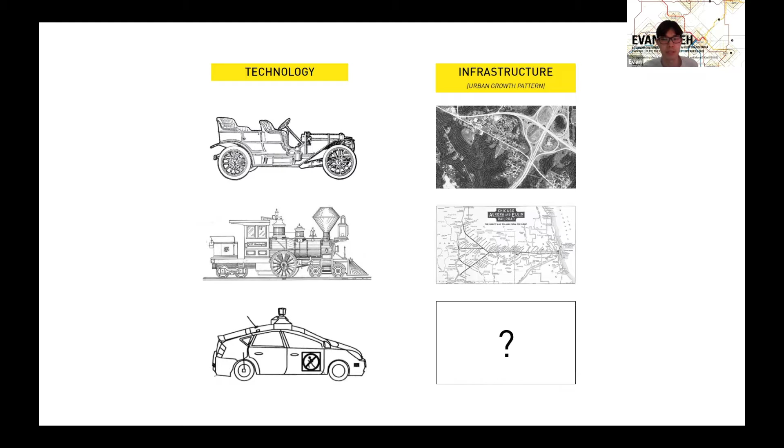Historically, technology has always had an intricate relationship with the urban growth of our cities. Understanding this symbiosis, I argue we need to think of the incoming AV revolution not only as new technology, but as new infrastructure that will have profound effects on urban growth patterns. Only by understanding the autonomous vehicle as new infrastructure can we conceive of it as a potential new system of mobility, with its blessings and flaws, just as the locomotive or the automobile became foundational infrastructure for city planning in their respective eras.

We also have to remind ourselves that despite the dominance of car culture today in the US, it's just one of many mobility and transportation types used to get around the city and plan our cities upon. With the introduction of the AV, we have to consider these larger issues and frameworks of mobility at large, which reflect cultural and behavioral norms. How we choose to move around the city has vast implications on how the city is planned and evolves, both at the regional scale and at the urban design street level.

Before we look too far forward, we also have to look back and understand the past. There has been a continual historic push and pull between private and shared mobility as the dominating driver of urban growth in the US. With the prevalence of the automobile today in planning and design, it's easy to forget that the US was once one of the leaders of public transit ridership internationally before the dominant rise of Fordism. So while the technology has wildly evolved, behavioral and cultural norms might very well have not.

In the 1870s, pre-automobile, apart from walking, there were two forms of transit you could take. You could flag down a horse-drawn hansom cab if you could afford it, or walk to a designated carriage stand and wait for a seat on a horse-drawn tram traveling on predefined fixed routes. The first method is analogous to how taxis and private vehicles operate today, while the second is essentially modern day public transit, how buses and rail work today. I bring up this example to highlight that time and time again in our history, the issue is not necessarily the technology itself, but how passenger behavior is associated with that technology, and how we can incentivize passengers towards certain modes of transportation depending on how we envision our cities should be planned.

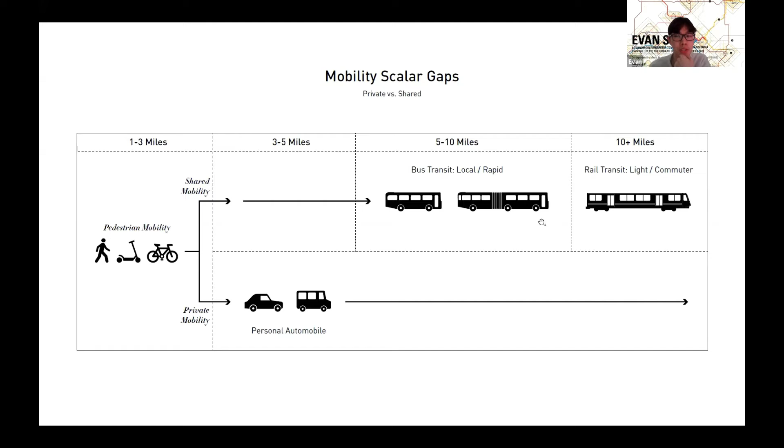And if there were to be a proliferation of the AV into the private mobility sphere—single occupancy, gasoline powered, privately owned—there's a real fear that automation would essentially become cars on steroids, enabling greater urban sprawl, exacerbating congestion, and highlighting mobility inequalities. So to me, I see a huge potential for automation to affect this sphere, which has the potential to really revolutionize transit networks around our cities in mobility.

So firstly, a whole new range of transit vehicle sizes can be introduced. Smaller mini shuttles that can run on flexible, on-demand service, kind of like how Uber and Lyft run today, but also all the way up to revolutionizing existing rapid bus transit.

And the biggest thing is the reduction of the driver cost, which accounts for over 60% of the cost of running service in existing rapid and local bus transit in cities today, which would allow an increase in both service frequency and coverage.

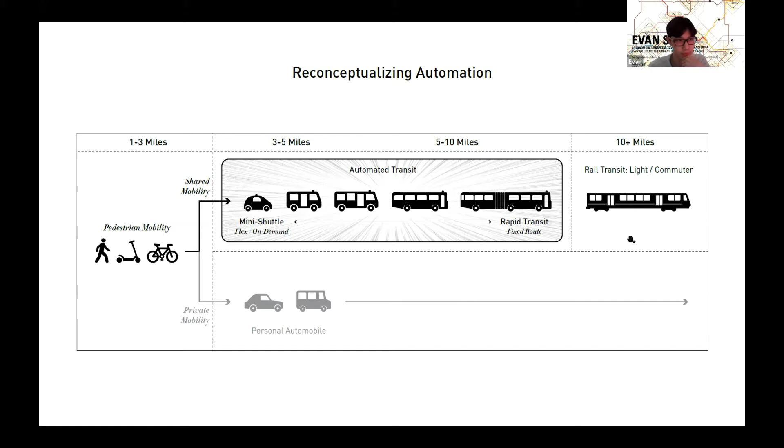So I ask again: what future do we aspire towards as architects and designers interested in the urban realm and the future evolution of the city? This value proposition must underscore everything we look at as urban designers, all the design work we undertake.

And if we do aspire towards this best case scenario, what is the framework for how to reach it? It's easy to imagine a kind of utopic vision of the AV-enabled city without providing a framework for how to reach that future. So, through policy, planning, and design, how do we get from the worst case to the best case? It's really vital as designers of the built realm to take a position so we can guide the introduction of the AV down that path before it's too late.

So in effect, my research speculation argues the following: the private car caused public transit to decline historically in the prototypical US city. And now we must use the automated shared car to return us back to public transit as a model of positive urban growth. The research is organized into three larger frameworks.

Part one envisions how the mobility model needs to change through key transportation policies that lead us toward this new model. Part two envisions how the everyday person, the everyday citizen of a city, would actually experience such a mobility paradigm shift. And part three explores the implications of such a paradigm shift on the actual city of the future for development and urban design.

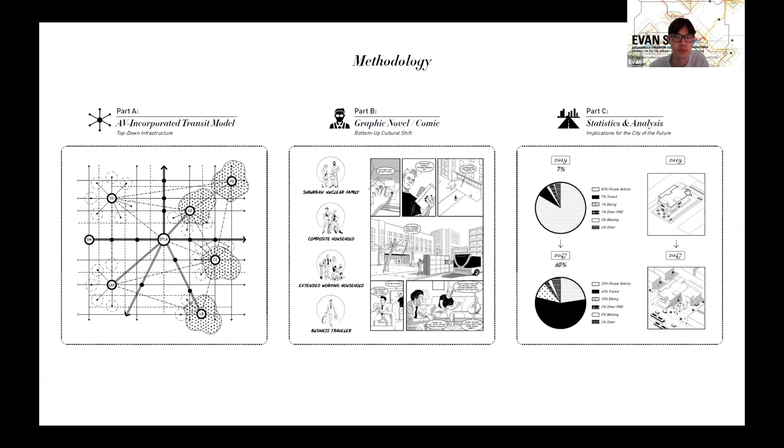The graphic novel is also a way to combat the historic proliferating celebration of the car in the American imaginary through media campaigns, car adverts, and especially through Hollywood. And it offers an alternative story that might perhaps be read by children and the everyday Angeleno.

Adults who grew up reading comics and are now in a position to impact change in the US, for example, can be convinced that alternatives to car culture really can exist, that there is hope to transition from the autopia of today to the transitopia of tomorrow. And of course, where better to situate this kind of potential speculation than Hollywood itself.

The city of LA, known historically for its love affair with the private automobile, a city where even carpool lanes have traffic, where the iconic urban typology is this mid-density urban mat or sprawl. A city Reyner Banham so famously describes in his four ecologies, naming one of those ecologies Autopia, the idea that the Angeleno drives onto the highway as a way to see and be seen, reconceptualizing the highway as a spatialized and privatized form of public spectacle.

But ironically, in its civic and historic DNA, LA has something before the car. This first period of LA, from its birth to World War II, is shown here on the left. The common misperception is that the private automobile caused its sprawl, but that's not true. Rather, private land speculation enabled by transit in the form of streetcars and trolleys drove the development of what we call streetcar suburbs, which produced the actual mega region of the city.

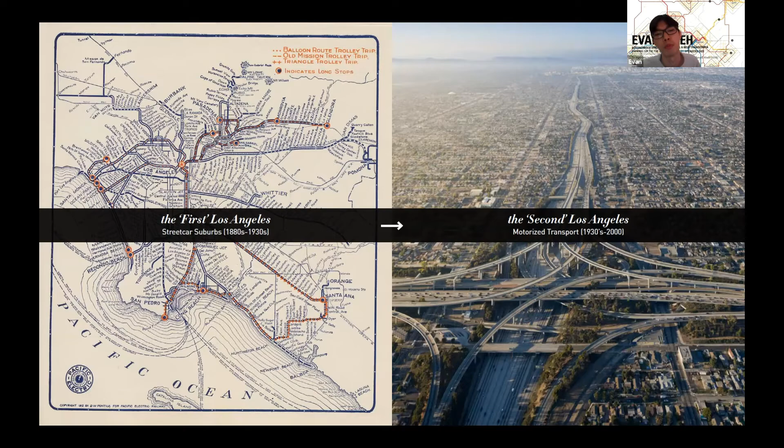The second LA, the LA that produced the stereotypes about cars, traffic congestion, and a shrunken civic realm following the dismantling of all the rail lines, runs roughly to year 2000. This is what most of us associate LA with predominantly.

My speculation places itself within the paradigm of what's called the third LA, which describes the city as taking real and measurable steps to move past the freeway and the private car. In this third LA, the city is folding back on itself, looking to develop more intensely inward. At the forefront of this emerging city is a massive investment in public transit that began since 1990.

In late 2016, voters in LA approved Measure M, which gifted Metro 120 billion dollars over the next 40 years to build a 21st century public transit system until year 2047.

However, when I was diving into this, I realized current Measure M budgeting and messaging has really focused primarily on the expansion of its light rail network.

However, statistics show that 80% of transit riders in the city take the bus, and of these bus riders, 92% are people of color and lower income. So unintentionally or not, Metro's obsession with light rail, a mode that targets more upper income residents of the city, comes at an opportunity cost of servicing and expanding the city's bus network, a service that hasn't seen a major upgrade in over 20 years.

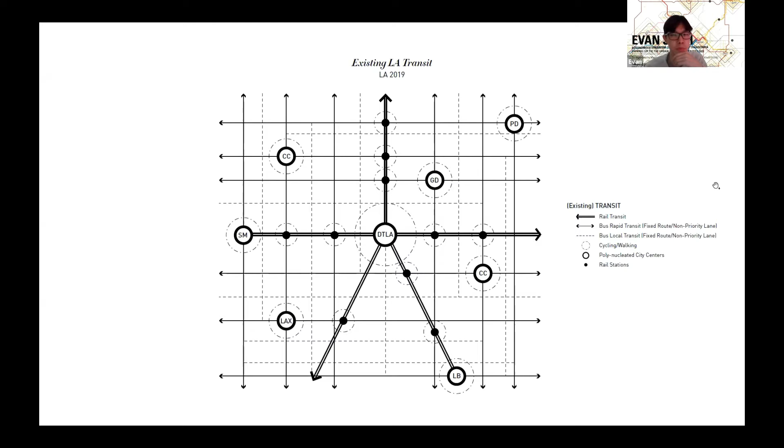Mapping the existing LA transit network reveals a monocentric, downtown-oriented rail network overlaid on the Jeffersonian grid of the city, reflected in its grid network of bus routes. But we know LA is actually a prime example of a polynucleated city, meaning it has multiple job centers scattered metropolitan-wide. The grid paradigm of the city, however, means that when traveling from polynucleated center to center, transfers between grid axes are often unavoidable and therefore inefficient.

So in the new model I'm proposing, polynucleated centers are first hierarchically connected by new autonomous rapid transit, which could be free of cost, subsidized by things like congestion pricing, for example. These BRTs could serve as precursors to the light rail, the first step in implementing transit spoke corridors that facilitate direct connections between polynucleated city centers.

Then fixed route local bus service and frequency is intensified around these existing hubs, filling in the 3 to 5 mile last mile mobility gap and creating a blueprint for intensification of urban growth and land use around these polynucleated centers. Lastly, areas between these centers, areas of low density that traditionally don't have enough density and ridership to support fixed route transit, are serviced by flexible on-demand automated transit mini shuttles, similar to how transportation network companies or TNCs like Uber and Lyft work today.

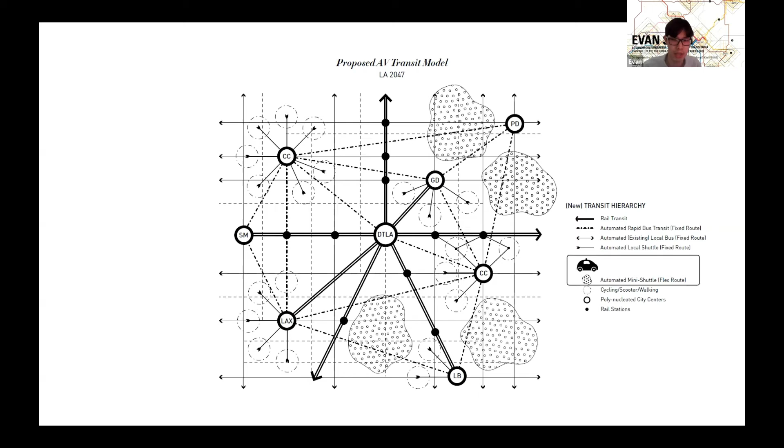Played out on the actual transit paradigm of LA, this results in a new model that cannot be categorized as either hub and spoke, nor as a grid, yet exhibits characteristics of both.

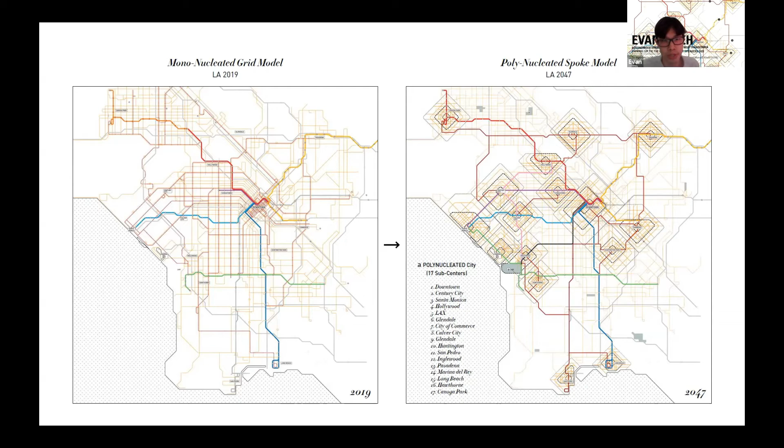The new AV-incorporated transit model much more accurately reflects the polynucleated nature of the city of LA, which does not have as defined a monocentric downtown core as most other cities do. It transitions the monocentric grid model of today towards a polynucleated spoke model that reinforces these job centers.

Zooming into this model, the new transit hierarchies and trip chaining are implemented. First, light rail is number 1, then BRT becomes the service line precursor forming the backbone of connections between these cores. Overlaid on top of the existing local bus network is number 3. Then a series of automated smaller fixed-route shuttles at number 4 service these core districts in zone B at high density of coverage and frequency.

Finally, an automated flex and on-demand mini transit shuttle service, number 5, services the lowest densities, single family suburbs, or single to mid-range densities. Low occupancy vehicles are disincentivized from longer distance commutes by transport zone fees, for example when crossing zone C boundaries, which I've outlined here. They work in tandem to support rail and bus rapid transit for long distance commute, while smaller automated vehicle sizes are used for medium to short range trips.

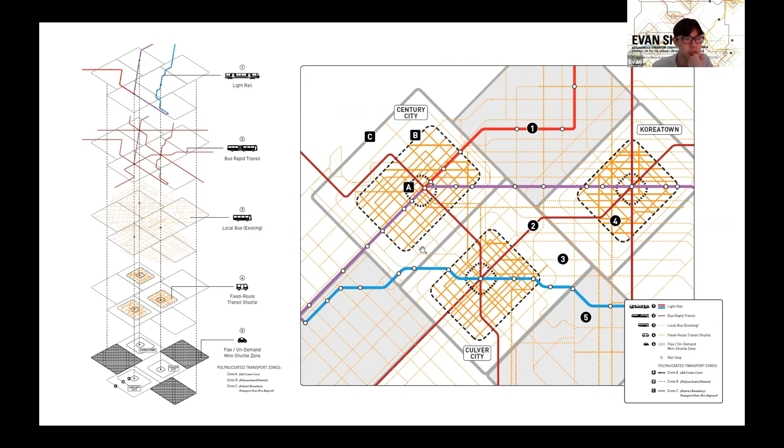Given the all-encompassing nature of this top-down transit paradigm shift, it's crucial to understand how this top-down network is used bottom-up by vastly different Angelino households whose commute types, trip patterns, and mobility needs are impacted. Collated together, they demonstrate the wide capacity of the new automated network to get citizens all around the city for their distinctive needs.

These 5 archetypes utilize this new transit in very different ways based on where they live, work, and run errands. So a day in their life takes them across many geographies and job centers as they interact both with each other and with the network.

Each of these households also represents widely varying incomes, demographics, and family structures, aiming to represent the majority of the Angelino population, from the upper income suburban nuclear family to the lower income family whose commute lengths are vast, to the younger millennials who bike the city, and even to visiting business travelers who use the city in different ways.

These narratives show 5 distinct experiences of the automation paradigm shift in what I'm envisioning for LA in 2047. Each of these stories shows how automated transit has actually improved their lives in key and noticeable ways. A lot of the topics I dive into are listed here.

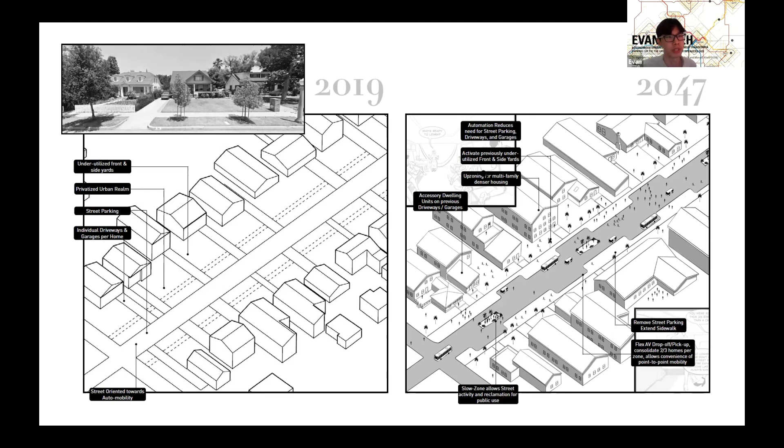Mrs. Smith's Flex AV has picked up one of her coworkers, Jenny, who is off to work as well. As they arrive at an intermodal transfer station, the transfer experience has been vastly improved, and transit wait times have been drastically reduced.

Mrs. Smith tries to convince Jenny that their need for owning a car is gone, which allows their family to add an addition to the home like they always wanted, as they walk from the metro stop under a covered shelter to the office building downtown.

Meanwhile, Mr. Smith begins his day by stopping at a local grocery store to run errands. Because he wants to avoid carrying groceries, he calls a Flex AV transit shuttle to take him home. While he's charged a higher trip fee for this convenience, it lets him replace owning a personal car with the same point-to-point service. Because it's a short distance, he avoids paying the polynucleated transport zone fee. On the way home, Mr. Smith adds a stop to pick up fast food for lunch.

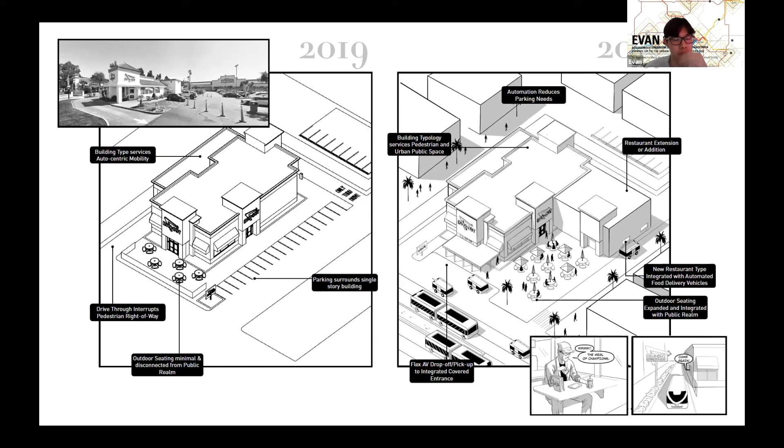One of the most infamous building types invented from the rise of the automobile, oriented primarily around the spatial queuing constraints of the car, is the fast food typology. This typology has now transformed in 2047. Because automation reduces the need for parking, the parking lot has been readapted. A new restaurant extension activates a newly created public space integrated with the sidewalk, while AV drop-off zones are integrated with the building entrance.

Meanwhile, back at work, Mrs. Smith and her colleague debate the best way to get to their midday meeting in Century City, deciding that automated BRT is both the cheapest and fastest option. In this future, the bus is integrated with the Metro app, which lets Jenny ping the incoming bus, reserve seats, and geolocate its arrival. Inside the bus, the experience has been upgraded, while AV BRTs receive priority and fast passage on HOV lanes and highways.

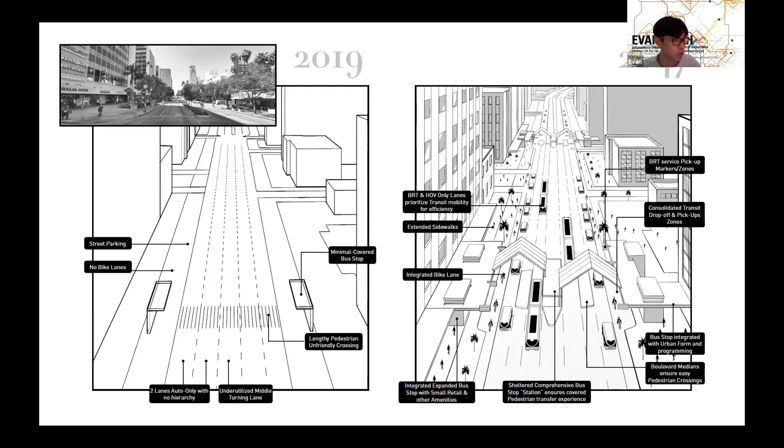When Mrs. Smith and her colleague transfer between two BRT stations, the transfer station has been vastly improved, along with the entire street composition and restructuring. Bus stops are covered and integrated with adjacent urban form, as well as activated by small-scale programming, retail, and other amenities while passengers wait. Boulevard medians ensure easy crossing and a covered pedestrian transfer experience.

Later that night, the Smith family meets in Culver City for dinner, and because both parents don't need to worry about driving, they can indulge in drinks. They call an on-demand AV transit shuttle home, which gives them a price discount due to the vehicle's high occupancy. By the end of the day, a summary of the day's trip charges is displayed on their Metro app, showing how transit in the city can rival the average cost of owning a car per day. This day has demonstrated that the shift toward transit as a mobility model in the city is not only economically possible, but behaviorally desirable, even in low density suburbs with families and lifestyles that demand the convenience of point-to-point travel.

The second story I want to share focuses on issues of transit equity, told through the lens of a city transit planner as she conducts a public engagement meeting with local residents directly impacted by automation. Here we can really use this narrative to tackle head-on issues of transportation inequality that have existed in the history of LA and North American cities at large, and explore how automation might be used to rectify, address, and improve conditions for those historically disadvantaged by new technology.

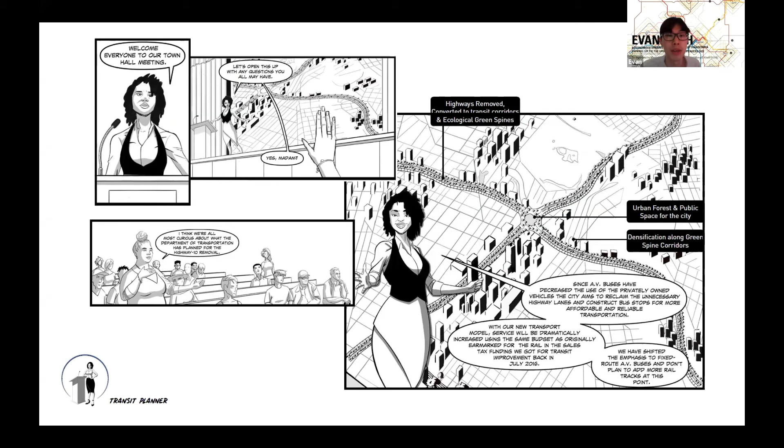Ms. Reynolds, our hypothetical transit planner, begins her story by welcoming everyone to the town hall meeting, explaining how, since AV buses and automated transit have decreased the use of privately owned vehicles, key freeways have been reclaimed at the metropolitan level and converted to ecological green spines and public spaces. At the same time, emphasis has shifted to fixed and flex route AVs with a dramatic increase in stops and services. She shows an image of the radical conversion of the former 405 freeway into an ecological green spine functioning as public space with urban forests and an ecological waterway for sustainability and resilience.

This converted spine also serves as a transit corridor encouraging new densification along its edge. Where the highway previously divided neighborhoods, especially lower income neighborhoods through redlining, with buildings turning their back to the noise, pollution, and traffic, the same footprint can now be flipped into a way to stitch communities back together with urban amenities. This might seem like a radical idea, but it already has a lot of precedent around the world today.

Some of you may know of the Cheonggyecheon restoration in Seoul, South Korea, where a major overpass highway cutting through the city was removed and restored back to a public greenway and waterway with a channelized stream, to great acclaim and success. It's hard not to imagine how something like that could actually happen in the US given the right vision and implementation.

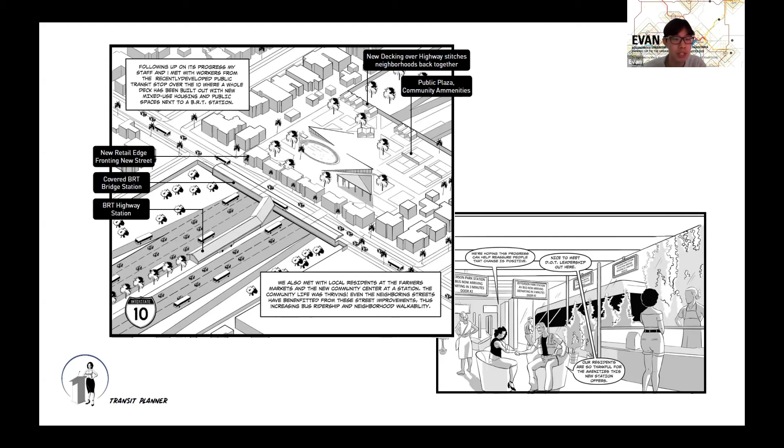So Ms. Reynolds talks about how she met with local residents at a new station typology the city has begun construction on. Where previously bus rapid transit stops were stranded on islands in the middle of freeways, a current condition in LA, the city has now decked over an underpass highway with a new hybrid public space and transit stop that literally bridges two communities back together, with amenities like sports and recreation, a community center, and even new affordable housing and a retail main street.

At this on-the-ground meeting, she talks with local residents about a new community improvement district initiative that has impacted their neighborhoods positively. In high traffic intersections like Crenshaw Boulevard, reduced vehicle demand has allowed previous multi-lane road right-of-ways to be converted to public space. This community improvement district plan, which I call a CID, is an alternative to BIDs or business improvement districts, allowing reinvestment of property tax back into the same community it's taxed from, with decisions chaired by a community board made up of members of that same community.

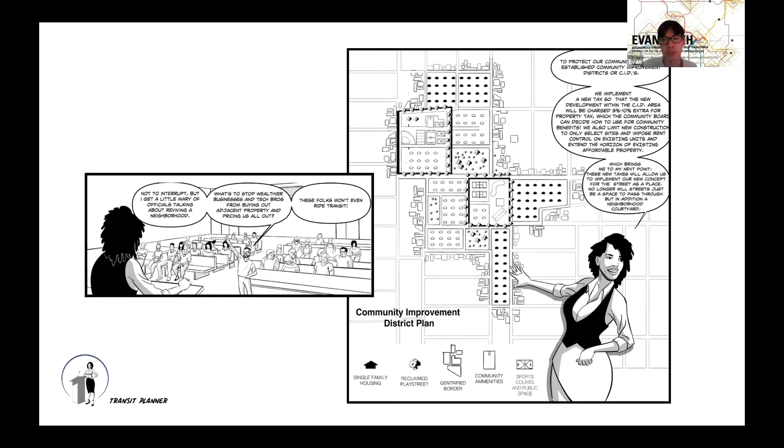Hand in hand with this idea of the CID is the idea that streets are a public community good and should be treated as such. Streets as a play space or front yard of communities can be reclaimed for public use rather than just for private vehicles. Ms. Reynolds explains how playgrounds, gathering places, and walkable, amenity-dense community services will be implemented at the ground level through the CID community loop, where development on outer, more commercial corridors protects the interior blocks consisting of single family housing, more typical of LA's urban grain, protecting them from development gentrification.

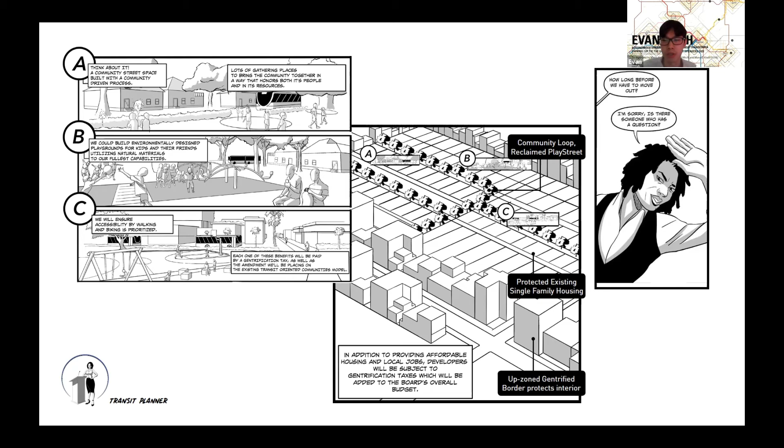Property taxes on these outer development corridors go directly into funding community-driven public and street space improvements on the interior. And of course, as Ms. Reynolds talks, the community voices much concern about how things sound expensive, who is supposed to pay for all of this, and gentrification concerns, but slowly members of the community board in other districts begin to testify how these initiatives have started to show positive effects in their communities.

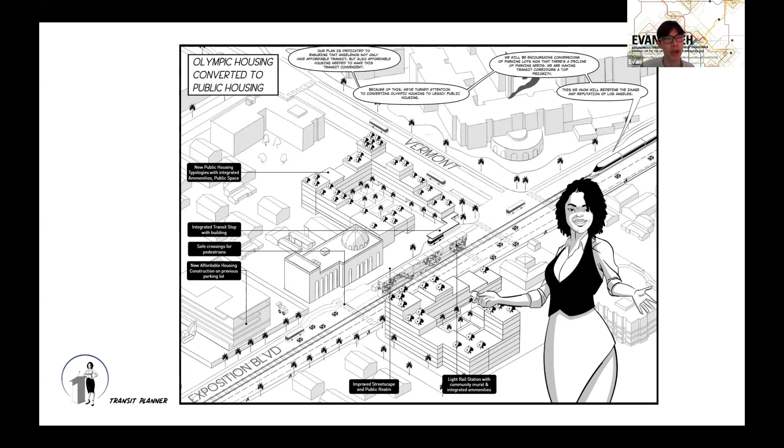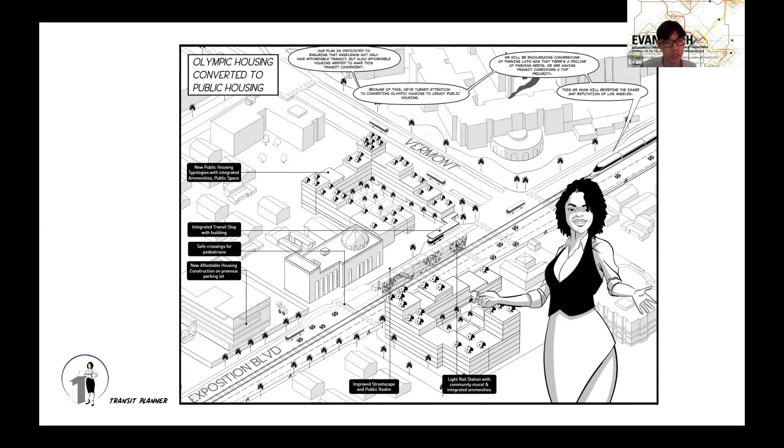For example, around the Jefferson area, she details how former housing created for the 2028 Olympics has been converted into a new model of affordable housing centered around access to affordable transit enabled by AVs. At the same time, the reduction of parking needs due to automation, especially in a city like LA where parking makes up such a large percentage of open unbuilt space, means new opportunities for affordable housing linked to transit-oriented development integrated with AV drop-off zones, transit stops, and an improved public streetscape.

Slowly the community comes around and begins to buy into the vision presented here, and the transformative power of automation to actually improve their lives in distinct ways. Ms. Reynolds explains how important it is that the community have direct input into the transformation of their neighborhoods. With this new transit paradigm comes a new responsibility to protect communities, ensuring that redlining and the inequities of the past are not repeated in the future. This is really the vision for the new LA.

So the remaining archetypes each tackle different issues when it comes to automation. For example, the composite household looks more at the larger restructuring of the street section and other urban form changes. The business travel story looks more at the actual business model of the paradigm shift towards mobility as a service, through potential public-private partnerships and private mobility companies operating under oversight by public agencies. And the extended working household looks specifically at how new labor or service shifts could be affected by this new kind of market, mobility and technology.

What I love about this format, if I can speak to the graphic novel aspect a little bit, is that it really allows me to touch upon, think about, critique, and imagine things not typically within our immediate realm of urban design or architecture, which is the physical design of the city. Mobility and new technology isn't just about the street, or the street section, or the physical design of urban space, but it's also about how you experience it.

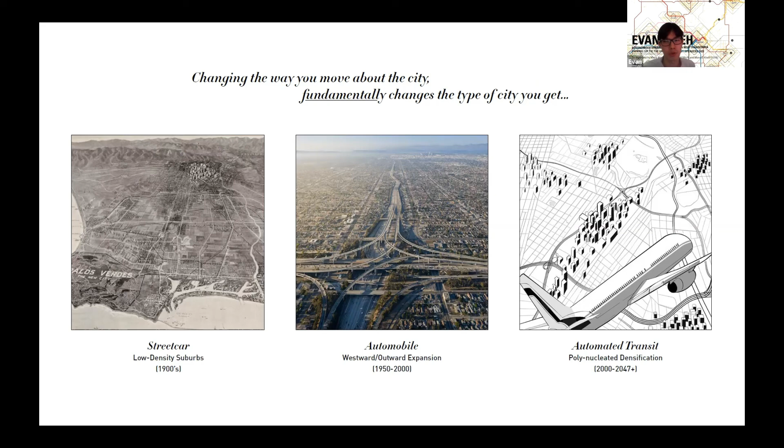As the city turns inward, away from the outward expansion of the first and second LAs, future development paradigms of the third LA have the opportunity to develop in clusters around this new transit hierarchy, where denser urban form, retail clusters, and businesses accumulate around these new polynucleated zones. If urban growth patterns were to develop this way, LA would transition from a car-oriented city to one that is much more mixed-use, dense, and walkable, transforming the urban structure of the entire region for decades to come. It's an urban structure produced neither by the first LA nor the second, but a transmutation of both in its third era.

Situated within a long lineage of urban utopias that have provided blueprints for urban growth, this new polynucleated spoke model is neither a true hub and spoke like the Garden City, which was self-contained and bounded, nor Doxiadis' ekistics model of human settlement, nor a true grid paradigm like Frank Lloyd Wright's Broadacre City, but rather exhibits characteristics of all three. This transmutation into a new paradigm results in a blueprint for a radical reconceptual shift in the future densification of the city.

So this design research speculation that I presented today takes the form of a three-part series: the automation model, the experience, and its implications in the future city. Each of these parts describes in more detail what I've covered today. The idea is that these three books should be read together as one, but they could also be distributed to a variety of different constituents and stakeholders, from the LA transit planner to the transport policymaker, to the academic, and just as importantly, to the everyday citizen of the city.

I think the key point here is that since we as designers and architects, our work is primarily about physical space, we also need to think holistically about systems, interrelated networks, experiences, policy, politics, and governance if we want to affect broad change in the urban environment. And in order to affect change, we have to be adept at speaking to different target audiences that can affect that change, because it will take all of those constituents and stakeholders to do so.

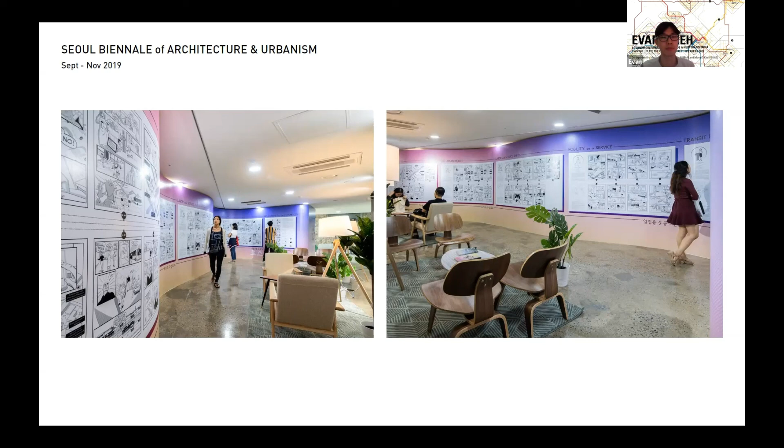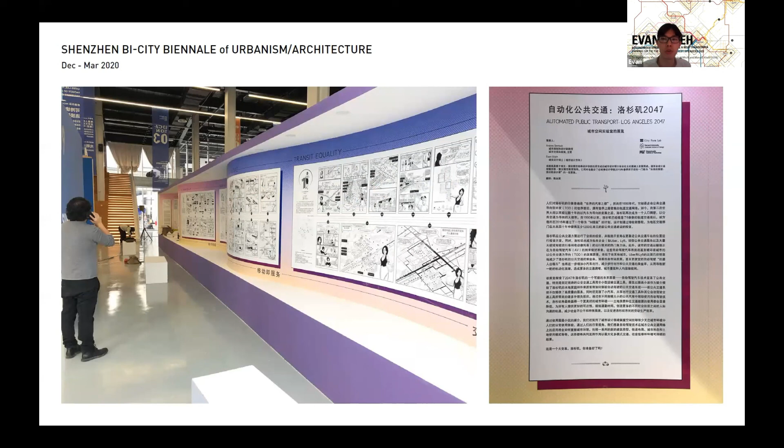I also wanted to prepare research like this to be distributed in many languages. So here at the Shenzhen Biennale, I had the entire novel translated to Chinese, to speak to an international audience that may be facing many of the same urban growth questions that other cities have faced in previous decades.

Lastly, I want to touch on the idea of post-pandemic planning, which is ever more important today, regarding how outdoor public space is used. In big cities, we almost saw proof of concept for this idea: if demand for cars and vehicular travel decreases, as it did this past year after COVID, streets can be reclaimed for public space. Don't let traffic engineers tell you otherwise. It took a pandemic to finally act as an impetus toward this reclamation. But the vision is that if we can get AVs to reduce private vehicular demand, just as the pandemic did, we can place value again on the public realm for human use.